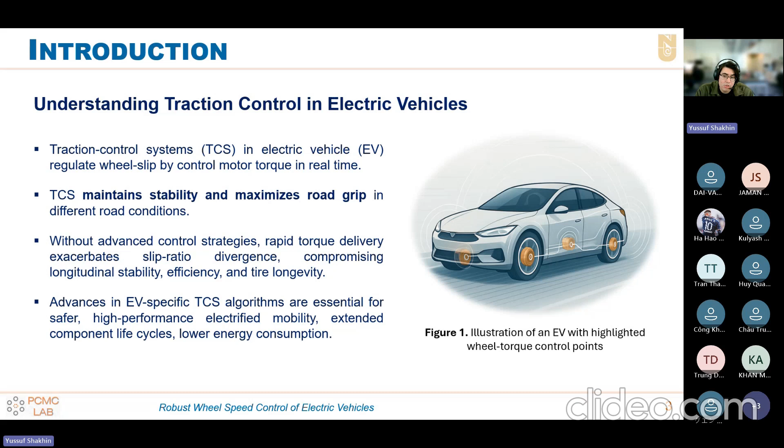In general, now we see that advanced technologies like electrical vehicles advanced a lot, faster than other big industrial technologies. And these traction control technologies are the pivotal and most important active research areas currently. So building on that foundation,

And if we check the previous studies, speed control is simplified, where the dynamics are neatly used as a first order plant, 1 over JS. And this assumption is not valid for onboard motors. They are mainly valid for only in-wheel type motors because the motor is directly connected to the wheel. But on board, we have a different type of mathematical model. So our research targets this tougher new topology and control for it.

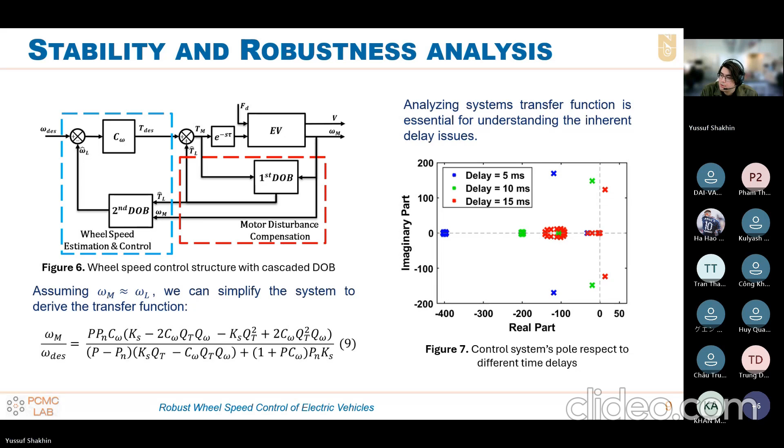So the second one, the nonlinearities. For nonlinear system analysis, we can use one of the popular methods called the circle criterion, which checks the system stability and robustness based on the bounded nonlinearity. Here we bound the nonlinearity based on the saturation limits. So we know the upper limit and lower limit of the saturation nonlinearity, and we insert these limits into the circle criterion method to get the stability.

So I can just easily explain that the circle criterion method says that a system is stable when the open loop Nyquist curve avoids the circle determined by these sector bounds, these upper and lower bounds of the nonlinearity, with all the poles already in the left half plane.

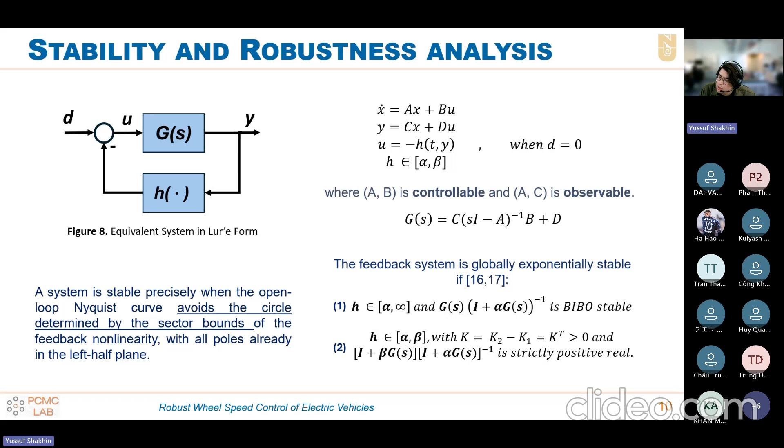Here I have some Nyquist plots to show you. Figure 9 shows the Nyquist plot of the transfer function with respect to the bounded nonlinearity. So we have the upper and lower bound for our nonlinearity, and we draw the circle for the circle criterion method. And here we see that our system's robustness to the parameter variations is very high. So we can see that J M and J L have very good robustness to parameter variations.

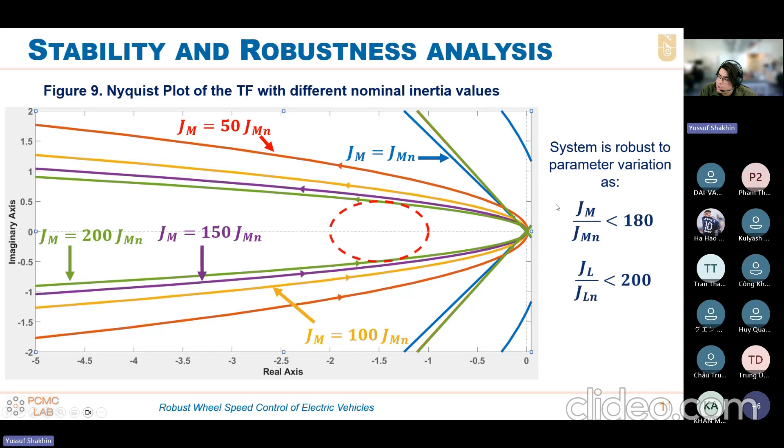I want to talk about the simulation results. We have conducted two types of simulation. The first one is using the worldwide harmonized light vehicle test procedure, WLTP. This is one of the standards for testing the wheel speed tracking performance. So the simulation results that I will show you consist of the first 100 seconds of the full speed pattern.

And figure 11 shows the estimation performances with respect to different time delays in our system. So we can see that even if we have high delay, our system is still able to follow the speed pattern very effectively. And our estimation performance is also very effective. Here is the speed tracking performance, figure 12.

We also conducted parameter variation for the mass because in real electrical vehicle applications, the mass can vary a lot. So even for a 50% mass change, it is very robust. And we added a slope condition to check a different type of electrical vehicle driving condition.

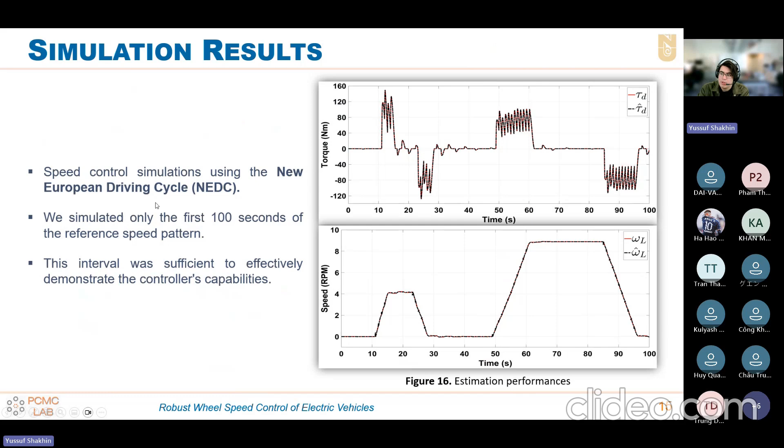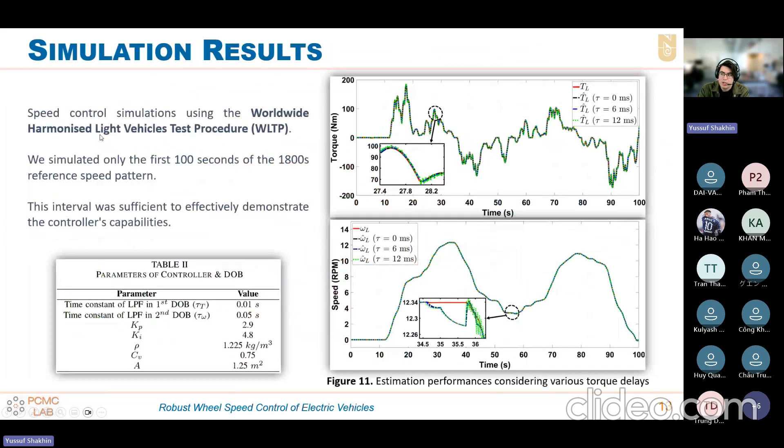Yeah, understand. So the last small question is, you do simulation. In that simulation, do you only consider the flat surface, or can you consider the slope? Can your vehicle move on a slope or only a flat surface? We conducted two types of simulation. When we used the New European Driving Cycle, it was flat, so there was no slope. Flat surface, different types of speed reference. But when we used the Worldwide Harmonized Light Vehicle Test Procedure, here you can see that we added some slope. Okay. It's good.

Okay. Thank you very much. I understood clearly. Okay, so any more questions or comments for the first presenter, please?

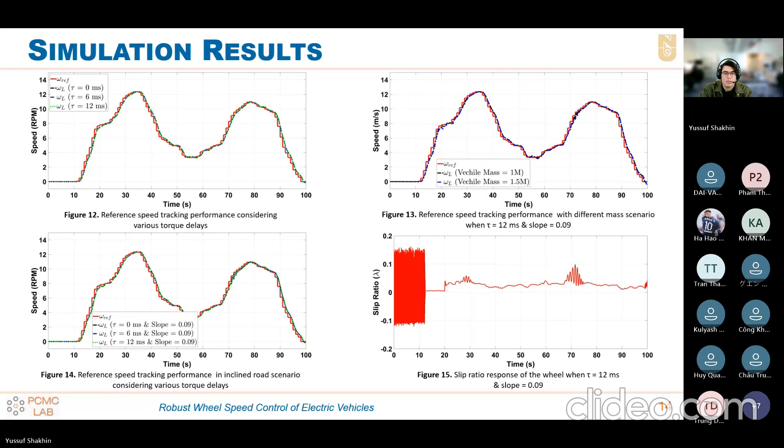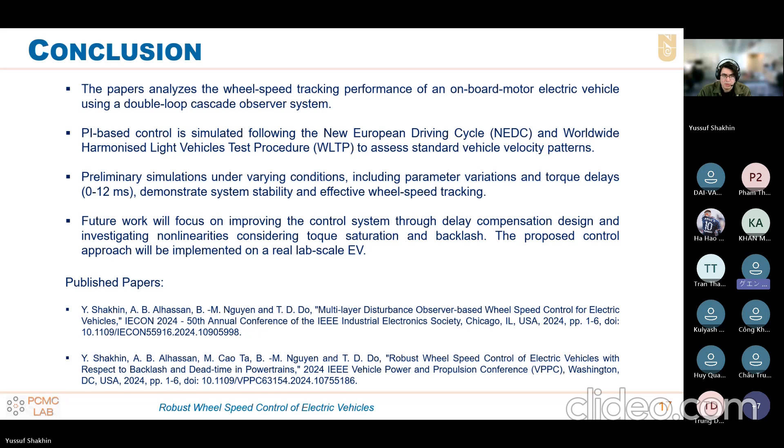Sorry. Mr. Yussuf, I have another question from the audience on the internet. He transferred it to me. He sees that your research focuses on using the DOB, disturbance observer. The audience member used a high order sliding mode observer for the same control objective as you, but you use the cascade DOB. Can you give any opinion or experience comparing the cascade DOB, your method, and his method, the high order sliding mode observer? Okay, please.

When we check the recent studies, we see that both methods are actually very popular, disturbance observer and sliding mode. However, we didn't conduct experiments yet, so I cannot comment from the experimental part. But from the literature, I can say that sliding mode control allows us to design better higher order observers or control systems. However, implementation becomes more difficult. Disturbance observer with PI is a more simple or straightforward method. If they give similar results, the disturbance observer based method will probably be easier to implement in experiments.

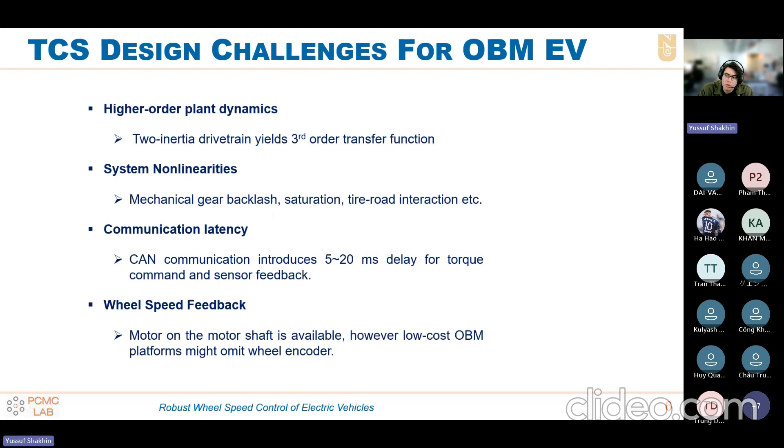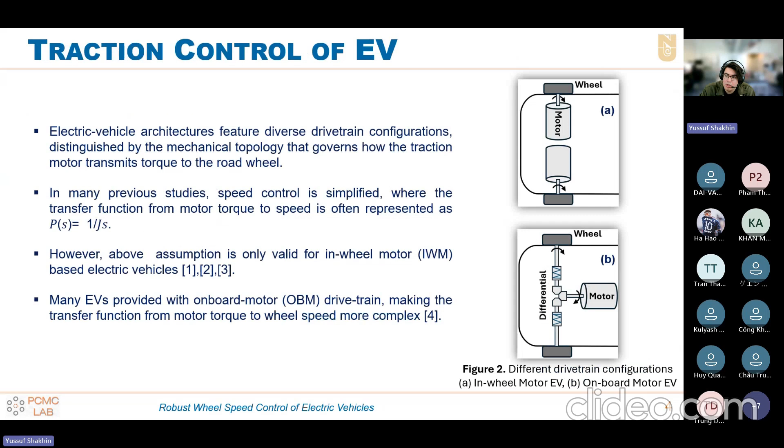Because we are talking about a very complex dynamic system. Therefore, that's what I think, sliding mode control might be very hard to implement initially. However, they can check Professor Min's recent papers. They also have some papers with sliding mode comparisons, so they can check those papers. But there they don't focus on the two inertia OBM EV. They focus on the in-wheel EV structure.

Okay, I understand your comment and your opinion regarding the two methods. Maybe there are some differences regarding the objective and your consideration. You chose the disturbance observer. No problem. It's a very good explanation. So, any more questions or comments for the first presenter?